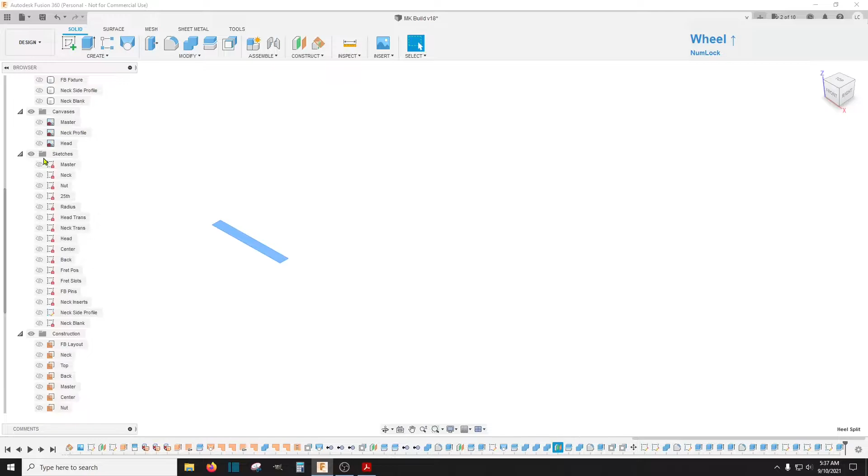Do you remember back here at this heel split, which was right here? Let's turn this neck back on here. Then after splitting the heel, we glued it all back together. And then all this top cap and everything, I stuck it all back together as one piece because I was going to paint the guitar.

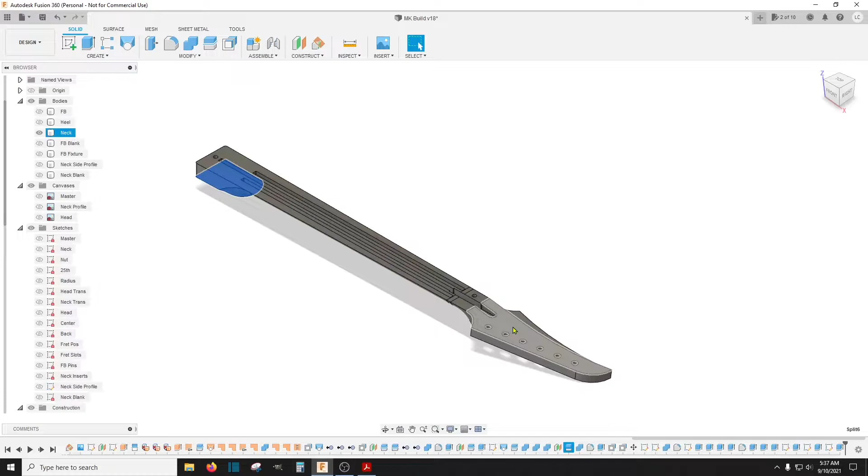That actually became quite an issue trying to mill this part with all that we did in here. It's going to be a lot simpler if we just back up now and learn a little bit more about Fusion360 and how we can fix things.

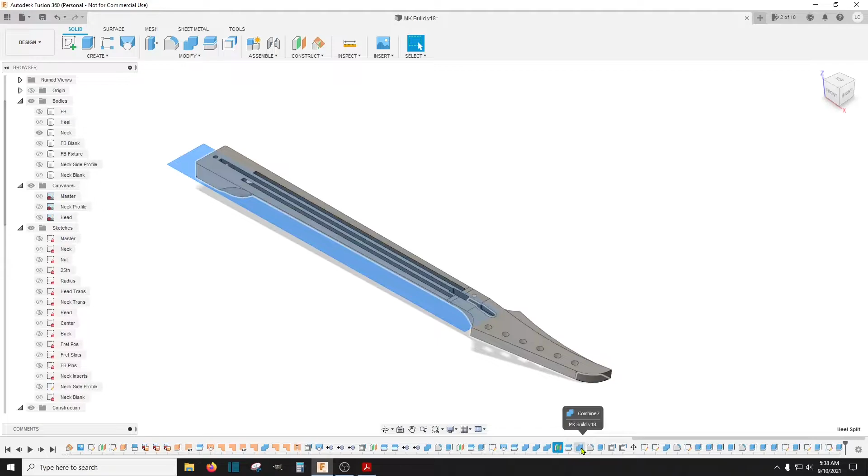So if we go back to this thing and we just say, okay, that's no problem, let's just get rid of that. So we delete that, and it warns us some bad stuff's going to happen. We delete it anyway. And actually that's not so bad. Those are the two latest sketches, which are that side profile and the holes.

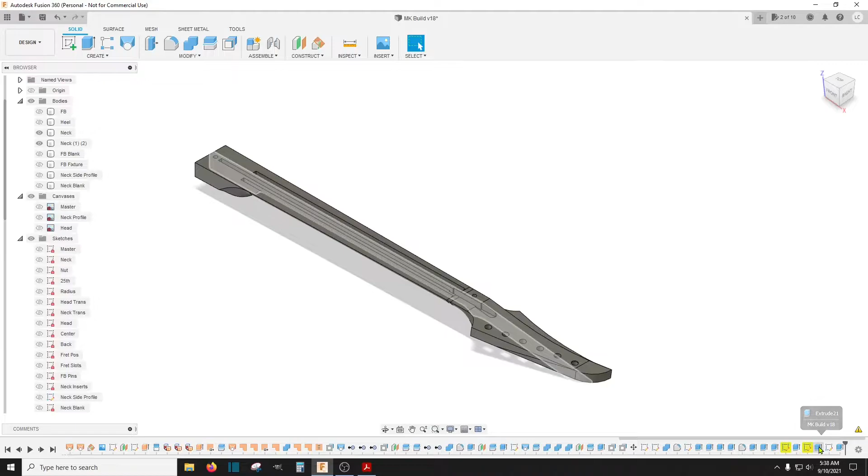We don't need any of those right now, we can add those later. So I'm going to delete this extrude right here, and I'm going to delete this neck side profile. I'm going to delete the screw hole extrude and delete this sketch for the screw holes. No biggie.

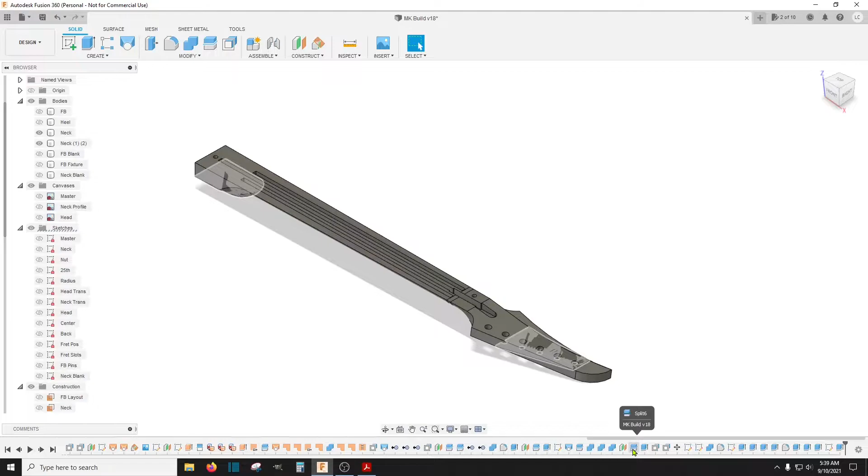And then back down here to this split right here. What else do we have? That's our nut. That's where we combined everything back together. So let's delete that as well and see what happens. Bad things.

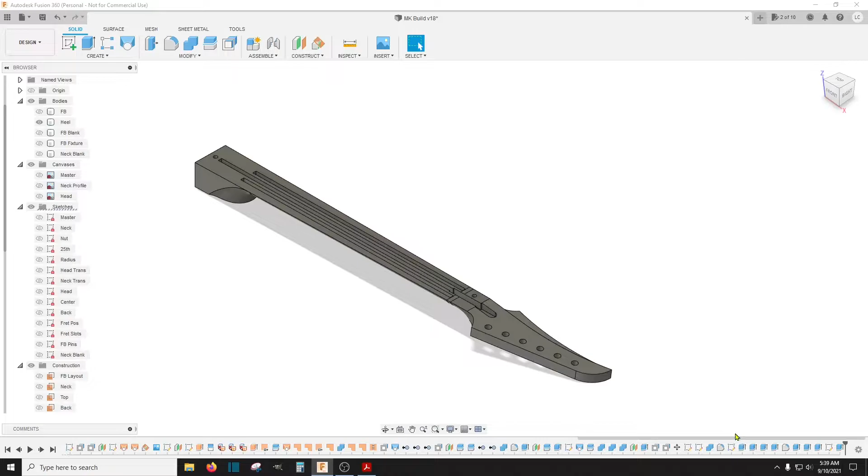Well, our neck turned back into a heel, so we turn the heel on, and that's still okay. It's all back together, we're still cruising, that's good. And so basically we got rid of that split, so we can get rid of this, so now we don't have the heel split anymore over here for a construction plane.

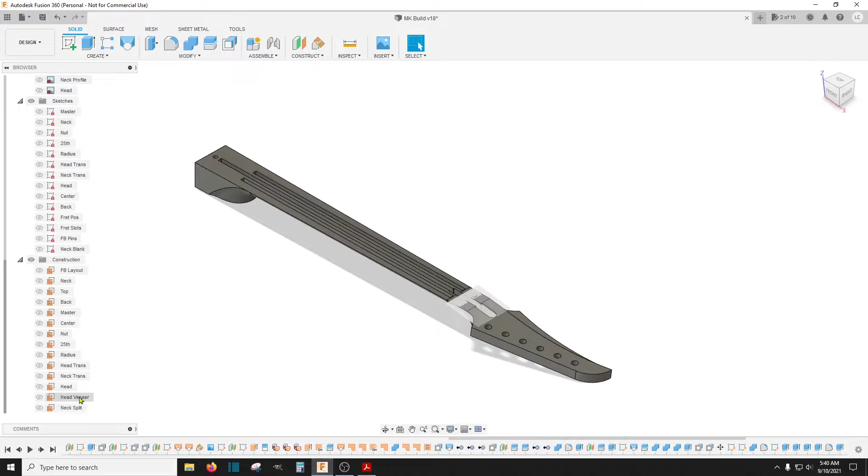That's good. Okay, and then all this right here that I stuck all together was the head veneer. So we click on that, we can see that started right here. So if we roll this way a little bit, this is fillet. Okay, there's the holes for the tuner pegs, and then we move to the next thing.

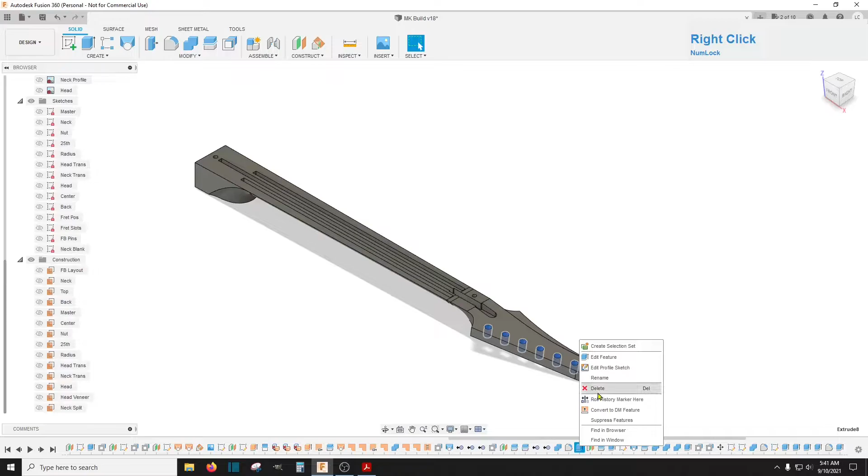So let's get rid of these tuner holes right here. Right click and delete that extrusion. And then this is that fillet I put in right in this area. I think we can get rid of that safely.

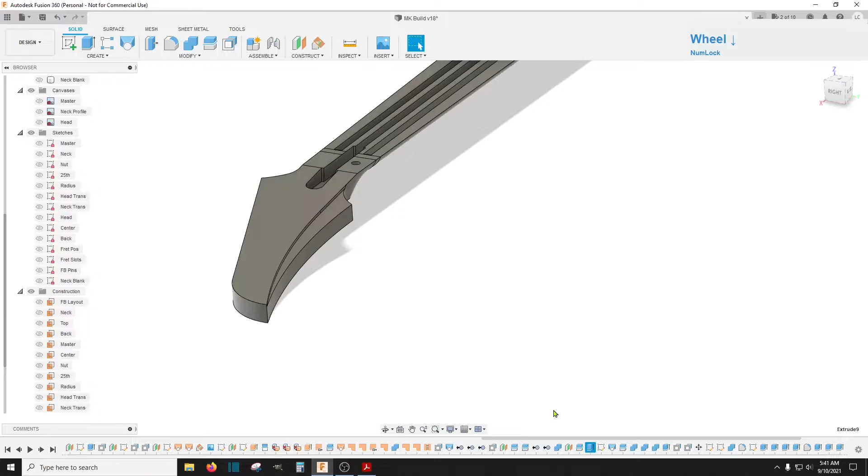And this extrusion, whoops, this one. And this is where it might start getting a little dicey here. Let's get rid of this. It's not happy about that, but I'm not concerned yet. Let's bring these other pieces back in that we removed.

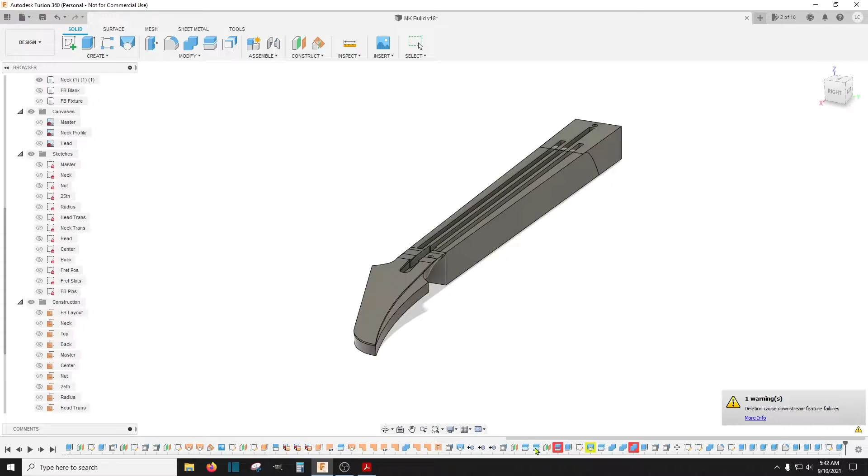And this one. Taking a little processor power to get all this done. Well, it's getting better. And then this one. And then this one. Just moving backwards down the chain here.

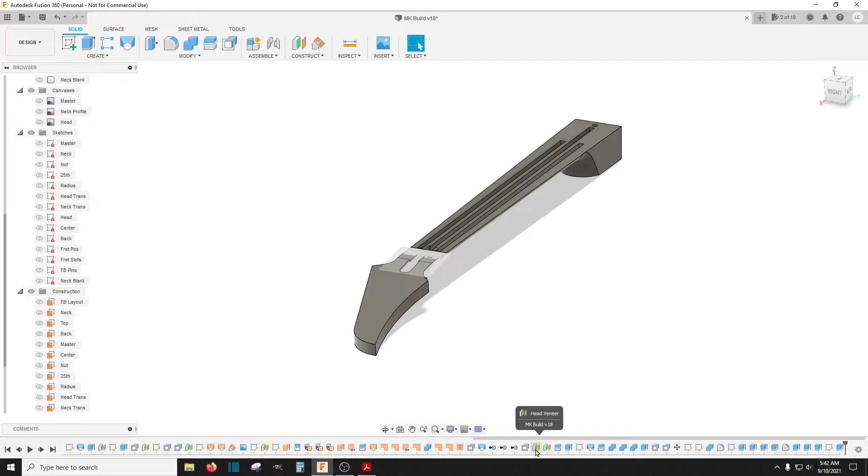And then this head veneer, we can get rid of that. And there we are. Now everything's happy and much easier to mill.

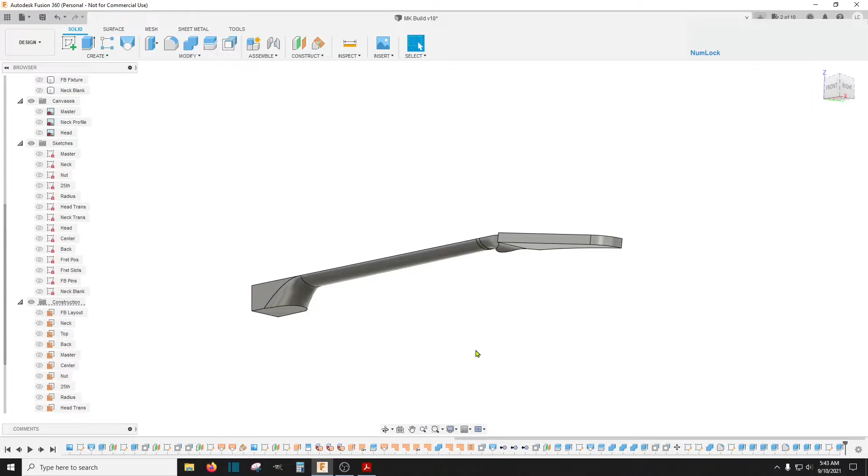However, while we're in here, we're still going to have to go back and split this heel off here. We'll do that a proper way this time. We'll do it now while we're thinking about it.

So let's do this. Let's, not that. Let's do this. This neck split. Let's change the name here to neck and heel.

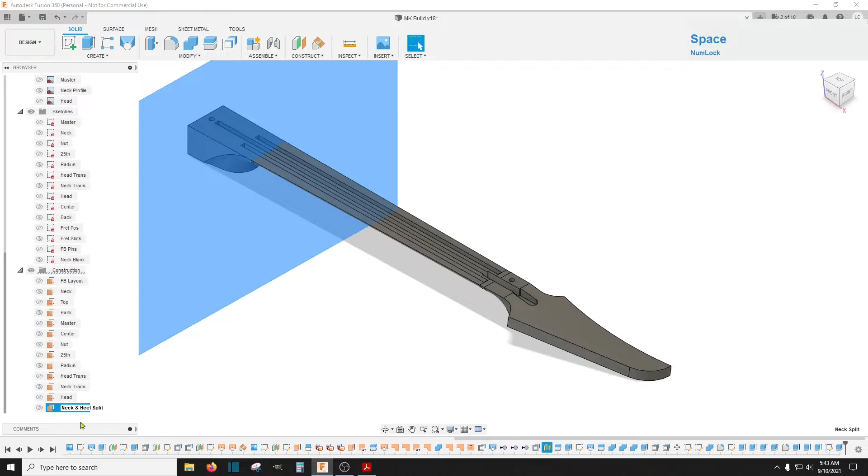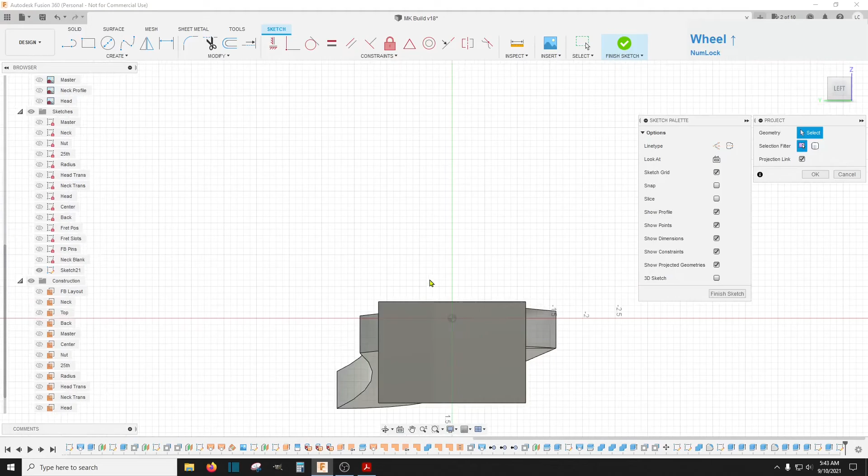Okay, and then on that neck and heel split, let's turn this model around, so we're looking at it from the left side. And on this plane, we're going to create a sketch, and we're going to project this top line right here. Say OK to that.

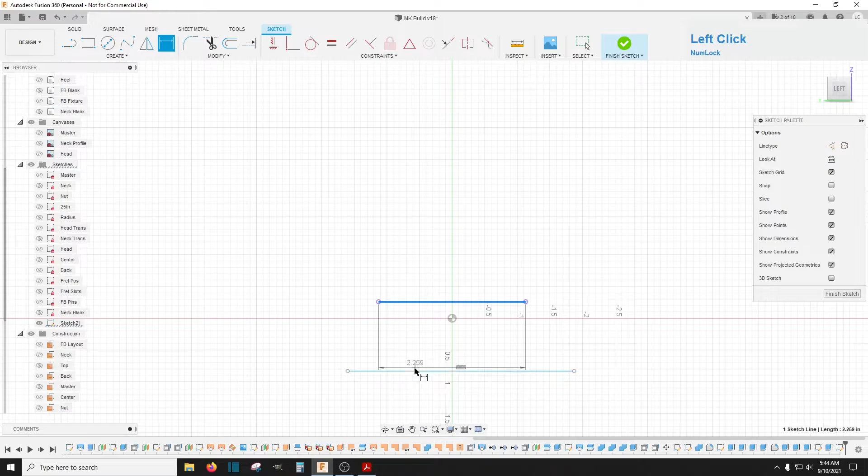Now we can hide that body, which is now called the heel. And we can just draw a line down here anywhere, just make sure it's longer than this line on both sides. And then we'll dimension that line, that pocket distance or that neck distance, which was 23.5 millimeters.

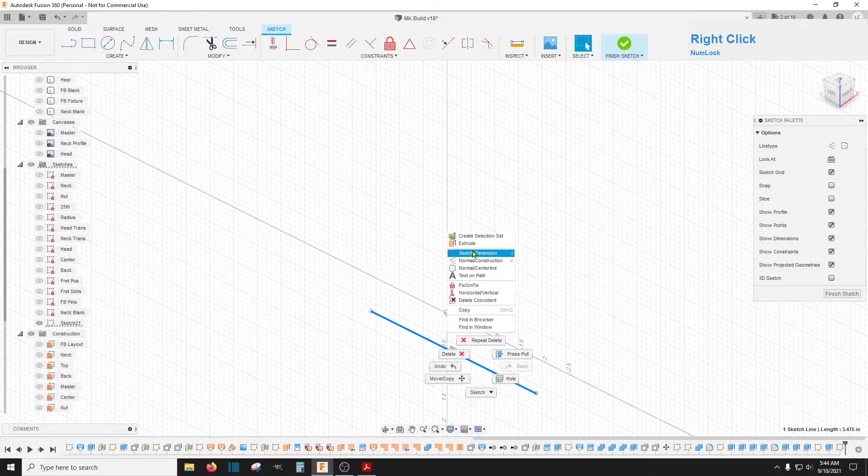And escape out of that and select all that line and delete that. And now roll this way and right click on that line and extrude it. Make sure it's the orange one here. And we'll head this way and turn that heel back on.

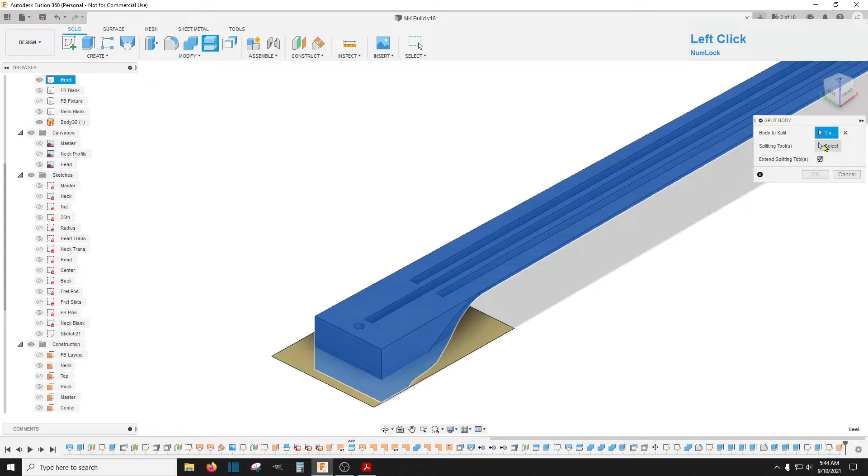And make sure you come all the way through that heel and click OK on that. And then split body, this body with this face, and you don't need to extend it. That would again split through the head if we did that. So turn off this extension and click OK. And then we can get rid of this.

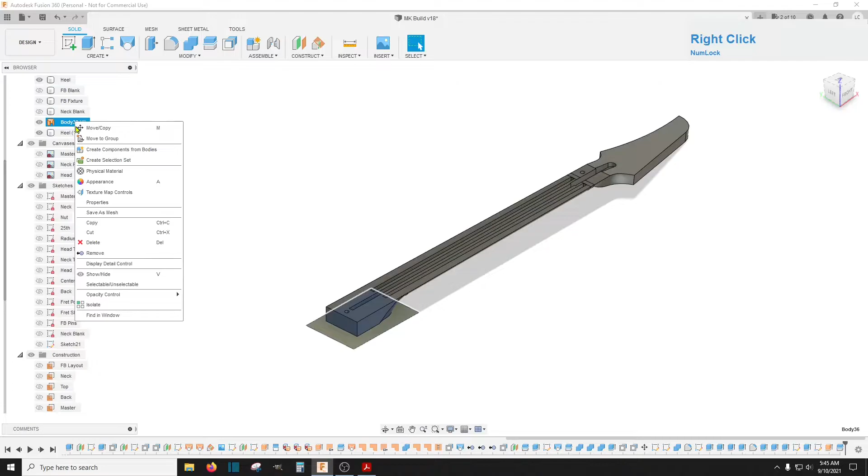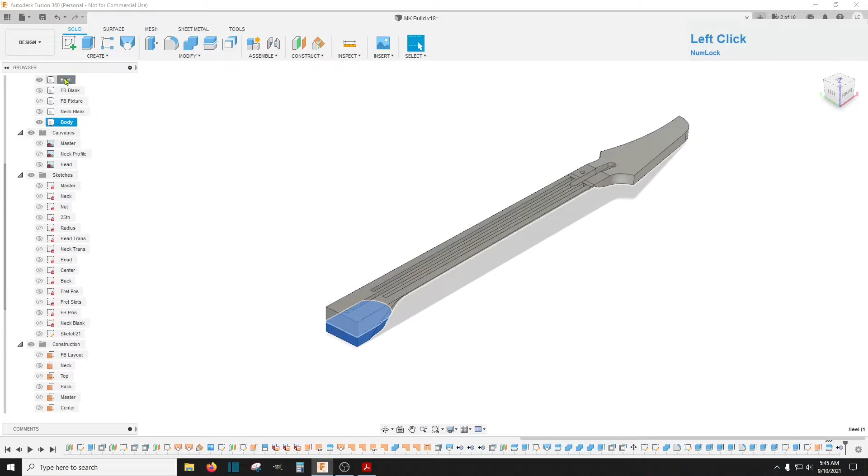And this heel 2 is now going to be called the body, or the heel version 1 is going to be called the body. And the heel is going to be called the neck. Can hide that body and continue with the build.

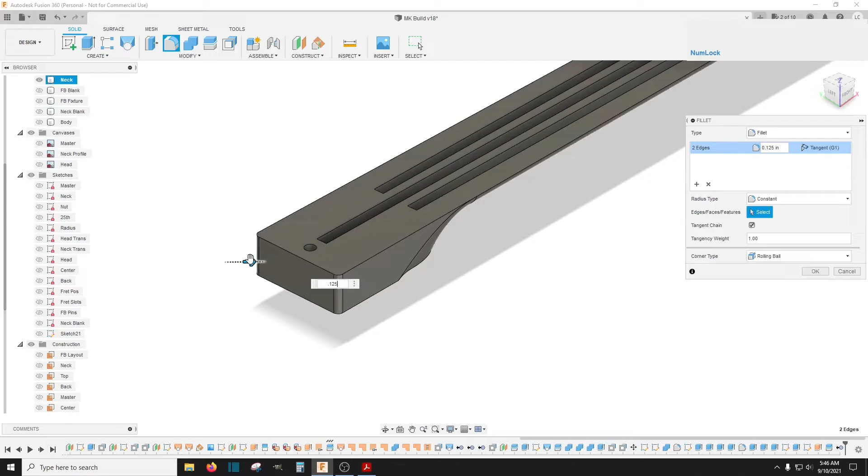Almost. I'm going to go ahead and put these fillets back in here, 0.125. Now this might run into some trouble later. I hope not, because we did it all up here at the last part of the sketch. We could have actually came back here and stuck it in somewhere back here before we did all this, but we'll see how it goes.

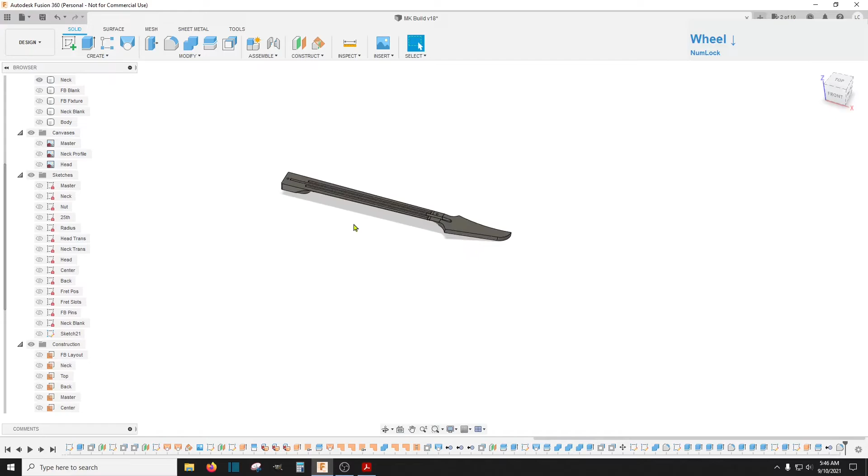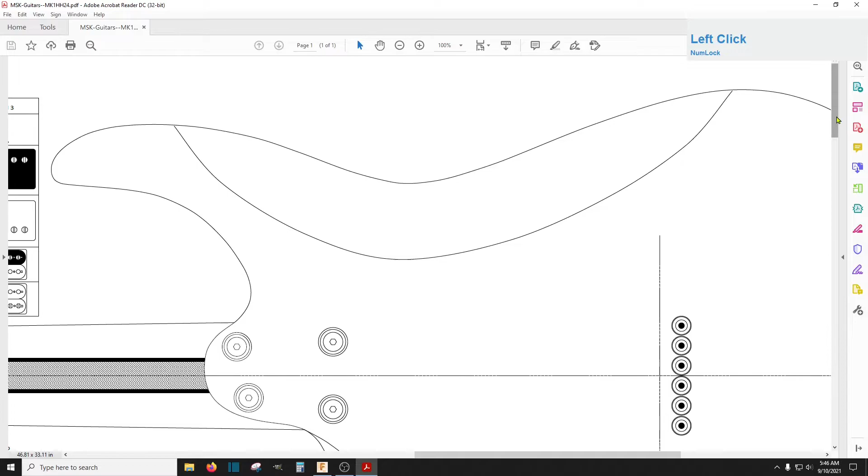You got to think about all this stuff, or if you run into issues sometime you have to move back in the timeline and do it further back in the timeline. So I'm looking at this sketch here. Let me get this up to size. And I'm not really sure why he did it the way he did it here.

So this head cap, this veneer cap, actually runs up and then apparently goes underneath the fretboard, which I think is going to look kind of weird to put that cap on and then put the fretboard over top of it. You have this weird little V-shaped sliver in here, whereas if you're going to put binding, which we are, it seems more reasonable to continue down the fretboard, and then you could put some binding around that little piece as well. I think that would look better.

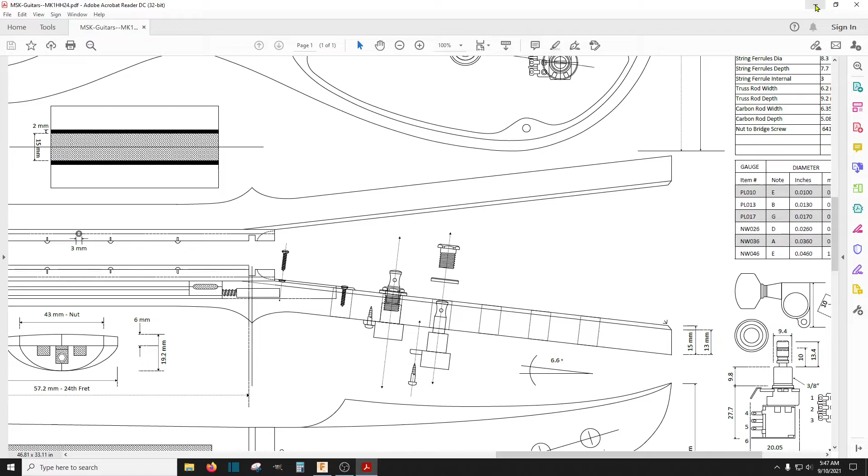So that's the way I'm going to change the design here a little bit. I'm going to close that up. So to do that, it's about 2 millimeters.

The first thing I want to do is go to this offset face and select these two bottom faces. I'm just going to type in a negative 0.08 inches, which is about 2 millimeters. So we push that face up to just under 0.5 inches now, or half inch.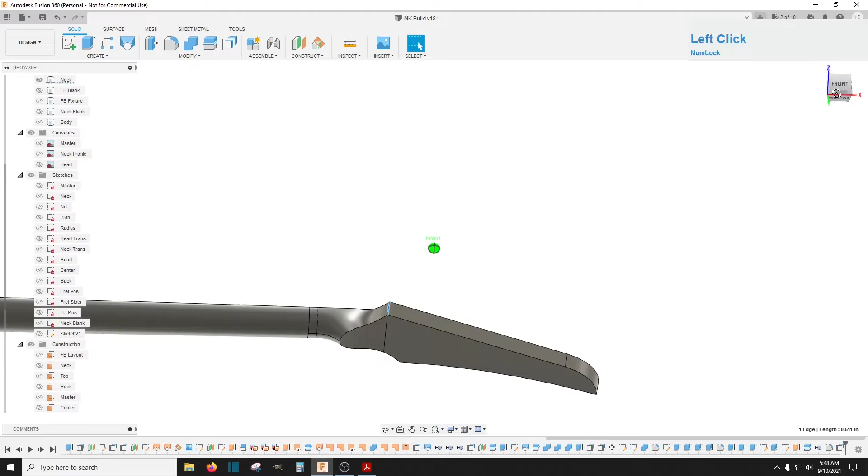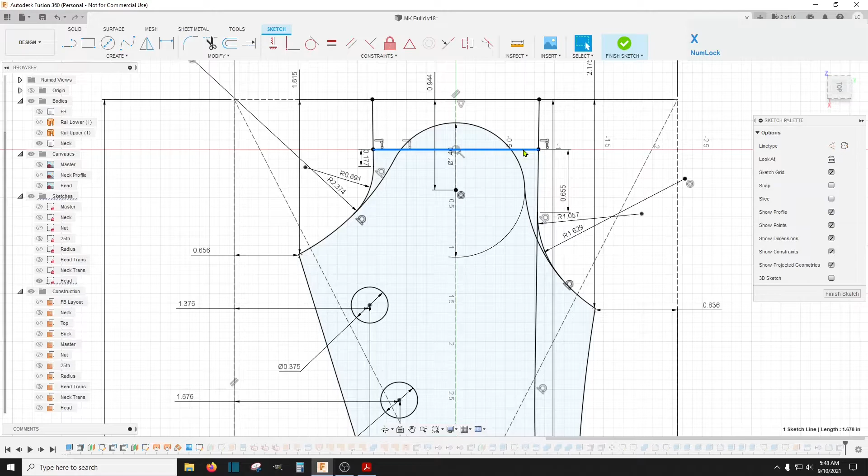And then I'm going to open up this head sketch right here. I'm going to edit that head sketch. I'm just going to click on this one line right here, this construction line, and hit my X key to turn that into a solid line and finish that sketch.

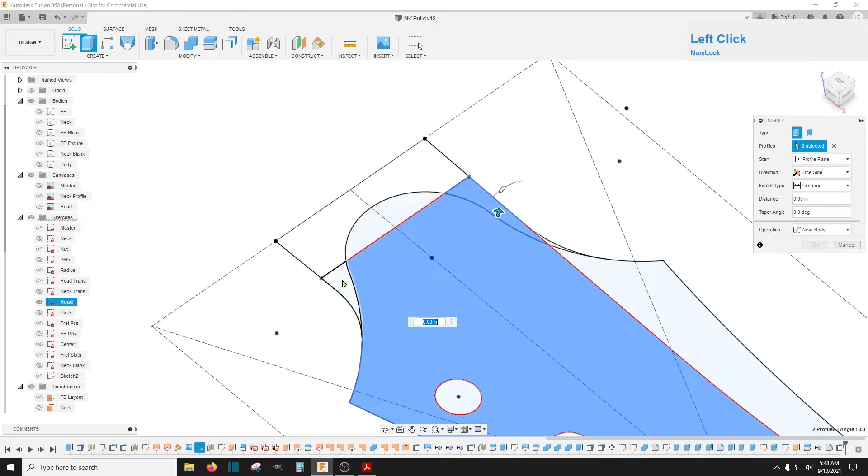Okay, then I'm going to turn off my neck, and I'm going to extrude all of this plus these two little wings out here on the side, and extrude that 0.08 or 2 millimeters. Now we have a new body, and I'm going to call that body the head veneer.

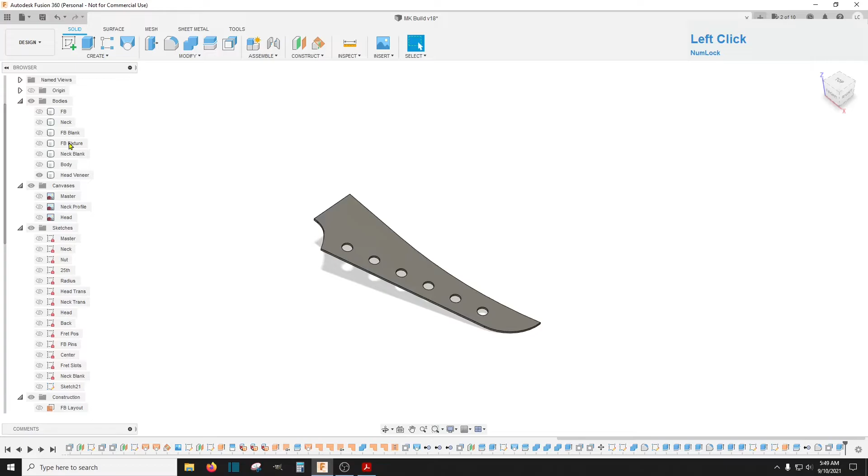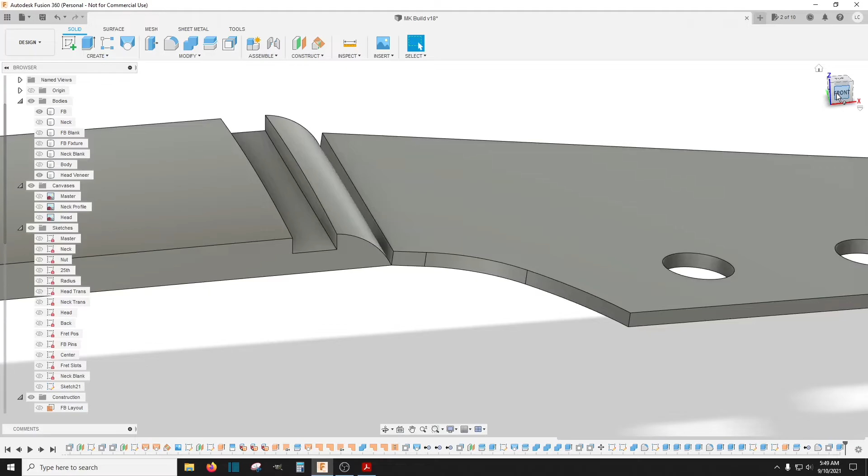Now we turn this fretboard back on. We need to consider how this head veneer is going to meet it - we will have to recut the fretboard or hand shape this to fit in here. So it's up to you how you want to do that.

I would start by extending this edge right in here. So if we hide that fretboard again and do an offset face, I would offset this face right here and bring it into the fretboard. Click OK. Turn that fretboard back on.

So either we can hand shape this piece to fit that radius right here and leave the fretboard alone, or we can cut the fretboard flush to where this head meets it. I think we'll just hand shape this piece over here.

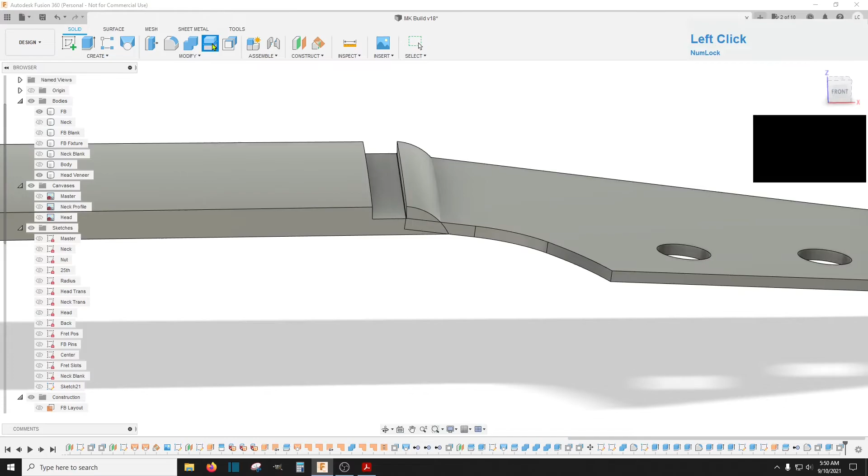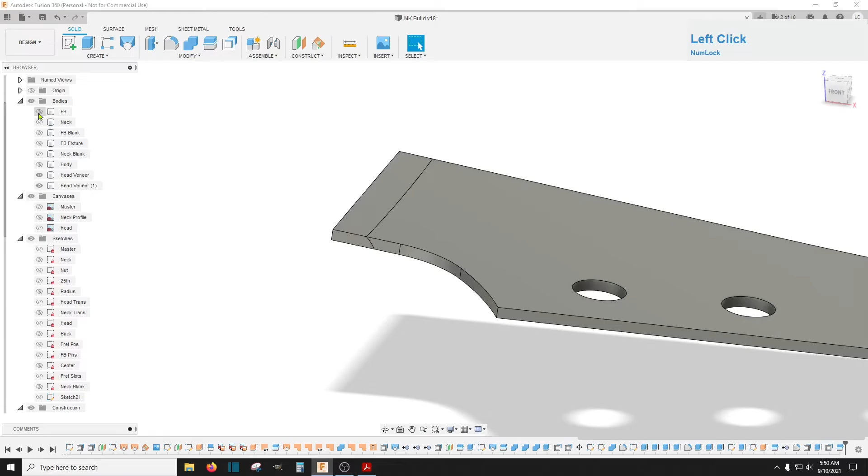So we will just go to split body and select this veneer cap, and then for the splitting tool we will just select this radius right here and extend it, click OK on that, and then hide this fretboard and then combine - target body, and the tool body will be here, and we'll cut and do not keep.

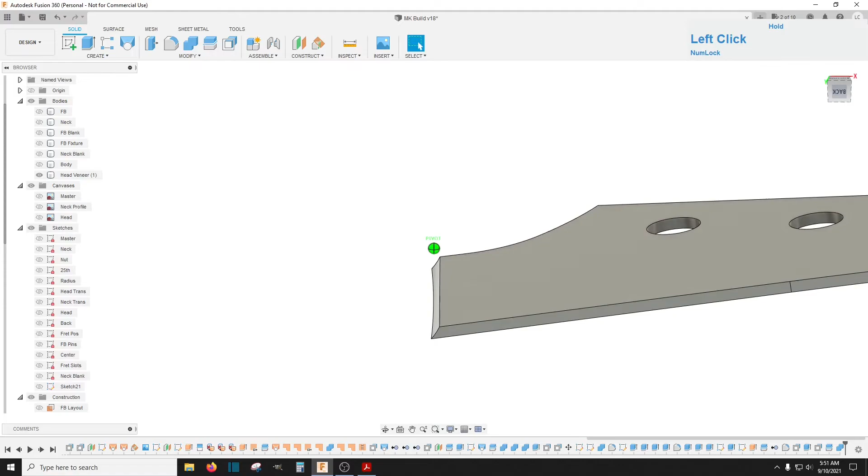So now when we cut this piece, I guess we could probably cut it upside down. Yeah, we can just cut it upside down, and then most of that will be done for us on the mill. And then that'll also give us our holes that we can use to drill through the headstock.

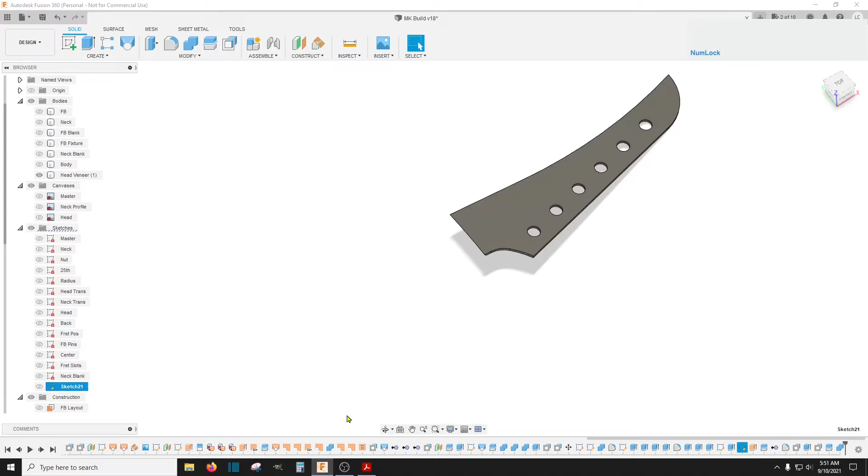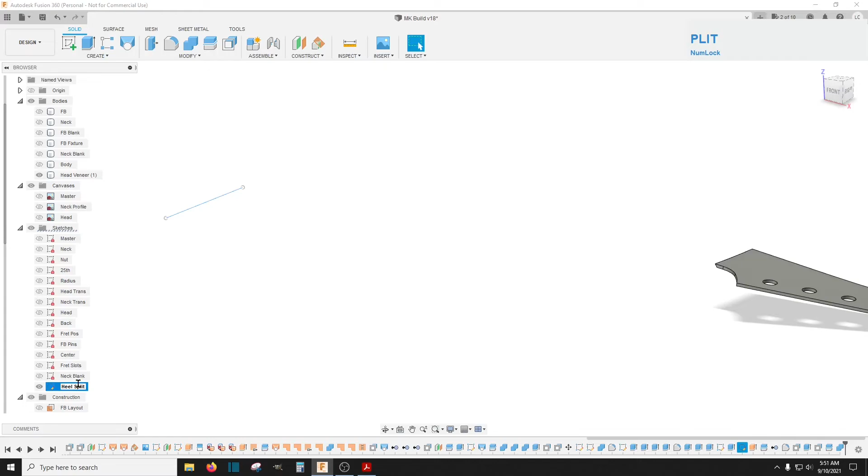Okay, so this is, what is this? Okay, so this is the new heel split. And I'm not going to worry about locking that one. May as well - I'm going to add that sketch and let's lock it down.

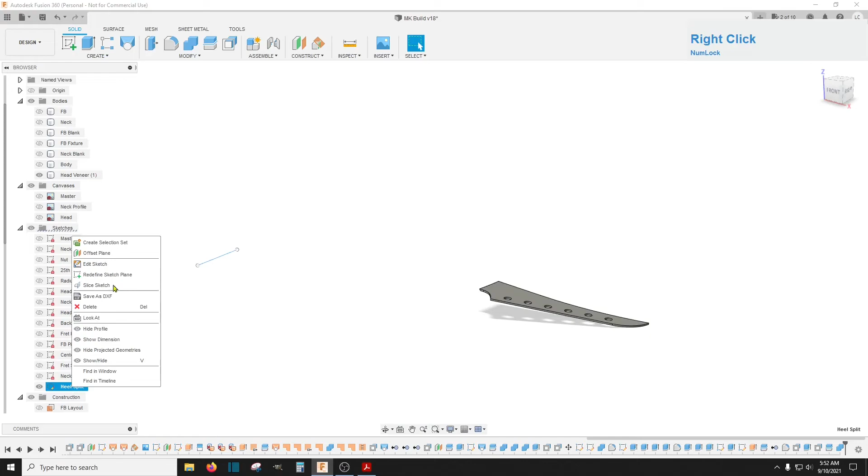Didn't take. Edit sketch. Select all this. Lock it down. Finish sketch. Okay, got them that time.

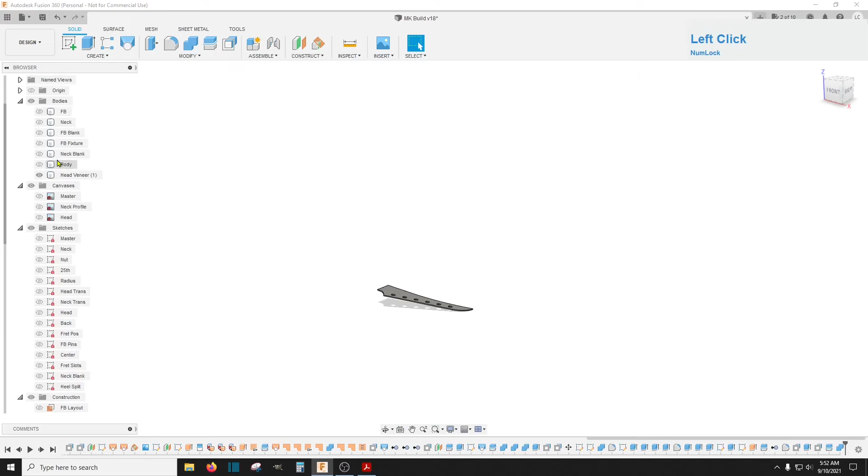So now we turn our neck back on and continue with our build.

Okay guys, just a quick video to get you guys up to speed where I am. It just wasn't the right thing to do. Sorry I led you down that rabbit trail. But I am not a guru at this. I'm learning as I go as well.

And two, when I cut through that and then had to paste it all back, I knew in the back of my mind I should slow down and do it a different way. However, I was in a hurry to get a video out, and I just went with it. And two, it's a good learning curve - you get to experience how to fix things.

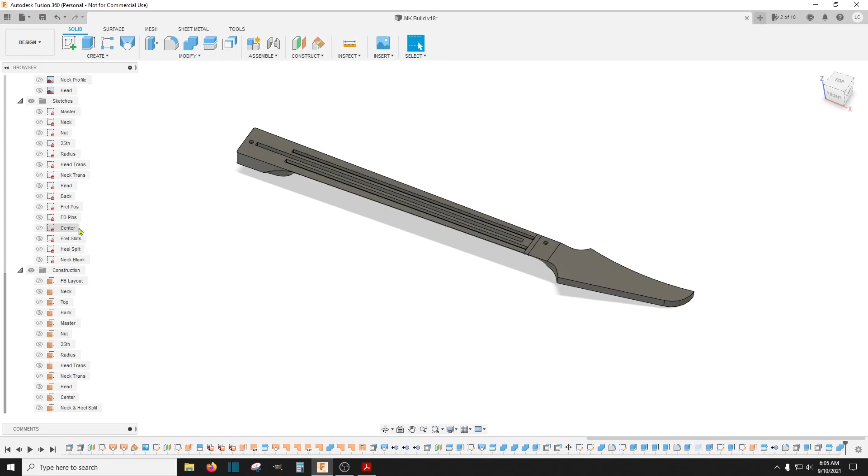So I think also at this point we are back to where, if you wanted to, we could change this angle now on this head. Let's check that out. So go back to this head angle right here, right click and edit feature, and roll this back up here a little bit and click OK.

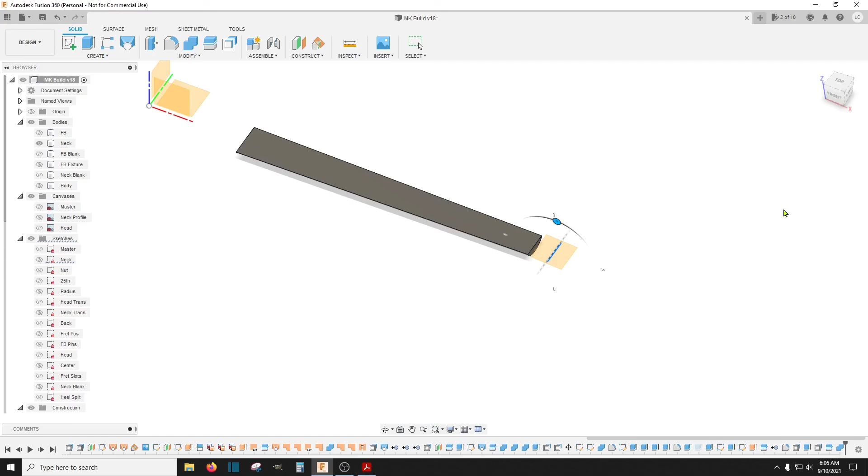And yes, we are back to full functionality. You can change the head angle again. Wasn't feeling good about that, so now we're right again.